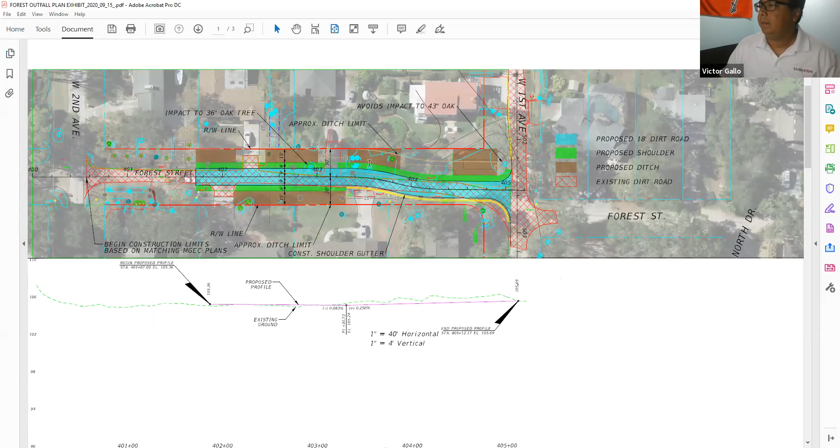This is the outfall improvement job for Forest Street between 2nd Avenue and 1st Avenue. We put this exhibit together. Let me see if I can zoom in a little bit more. Just to kind of talk about in a plan view level what the concept of our preferred solution looks like. In red cross hatching, you can see the existing road, the existing Forest, northeast to your right. And you can see in light blue the new alignment of Forest Street. And basically it follows a similar alignment.

It just has a typical of 9-foot lanes, 6-foot shoulders, and open swales on left and right. Just to go over the legend here, you can see the 18-foot dirt road that we're proposing in blue. The green is the proposed shoulders. The brown is to show the grass swales that we will be proposing and the limits of that, obviously between driveways. And the cross-hatching, like I mentioned, is the dirt roads. In the bottom, you can see the existing profile in dashed green. And in magenta, you can see the proposed profile of Forest.

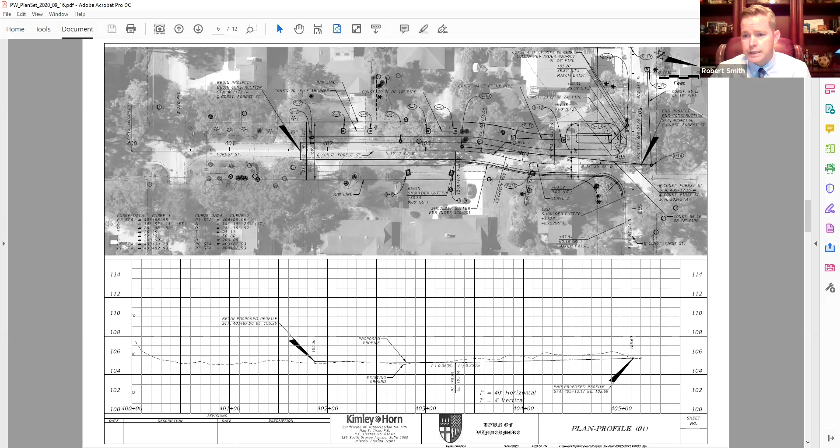Now, this is actually being fully funded by the town, so you can go less than the 18-foot travel width. But as town council has said in the past, we want to maintain dirt roads. The issue that we have is that we have a hodgepodge of road widths all throughout town. Now, people refer to fixes or semi-fixes that were done in 1983, 1993, 2003, 2011, 2012. All these projects were done without engineering. These projects pretty much die when you have people leave, when you have transition in employment. So the fixes, the graders and stuff like that, unless you have a typical section and an overall maintenance plan to maintain that typical section, it's very hard to do an overall plan for the entire town, because we're consistently inconsistent on what our roadways look like.

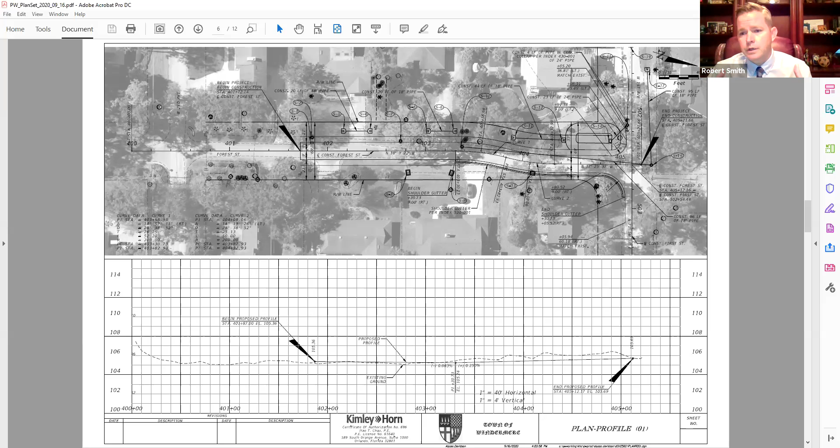But our intent, based on the concepts, is to make the roadway width as minimal as possible with the 9-foot travel lanes, and then utilize the shoulders and the swale systems to capture the stormwater until its final destination, which would be the actual retention area, and it percolates into the lakes. And if I said anything incorrect, Victor, you can go ahead and correct me. Your scope does include a final design. But again, right now, it's just showing you what the conceptual fix to this issue would be based upon the entire basin area, the improvements to West 2nd Avenue, and the issues that the adjacent residents have seen over the last couple of years.

Right, Victor? That's good. That's good. All right, thank you. Just want to make sure that nothing is out of line.

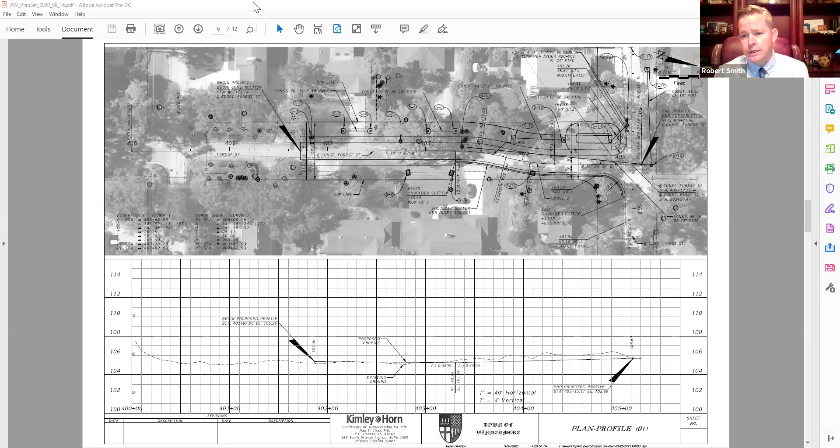And again, just because it shows a brown area, which is a horrible color to show people that it's going to be a ditch or something like that. You look at a 4-to-1 slope so you can mow it. It's grass. It's what you typically see as far as a swale system.

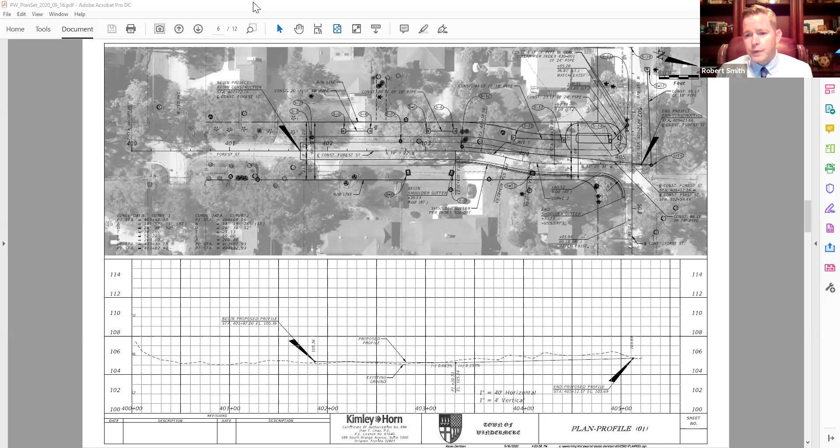And believe me, like with every other project that we do, we include arborists. We make sure that we try to protect every tree that we can. Even if there is an assessment done and it's determined to be in poor health, we'll try to do what we can to make sure that we regain its health if it's possible. And again, we have 60-foot right of way that we can meander this roadway by utilizing that typical section.

So, Robert and Victor, for clarification purposes, if it says a tree is impacted, does that mean the tree is going to be cut down, or do we have alternative methods to deal with the impact on that tree? Just so we're all speaking the same language.

Again, through the concept, we didn't utilize a certified arborist because we want to come up with a concept before we get into actual design plans. But we would defer to the arborist to make sure that if there was no way that we can go further to the east or further to the west to get out of its drip zone or its root system, what other best practices are available to save those trees?

And then if there is pretty much no other way to save those trees and it has to come down, we'll make sure that we mention that to the property owner. In addition to that, we would try to do whatever we can to make sure that we replant and reestablish whatever tree canopy is there that does not have a negative impact on the stormwater system that's constructed.

Right, Victor? Correct. So as far as the exhibit goes, for the footprint and the concept that you've seen, our assumption, without getting the arborist involved at this point, is that the edge of the road is too close to the tree. Therefore, we are here to have this dialogue and conversation. We're assuming that this will be impacted.

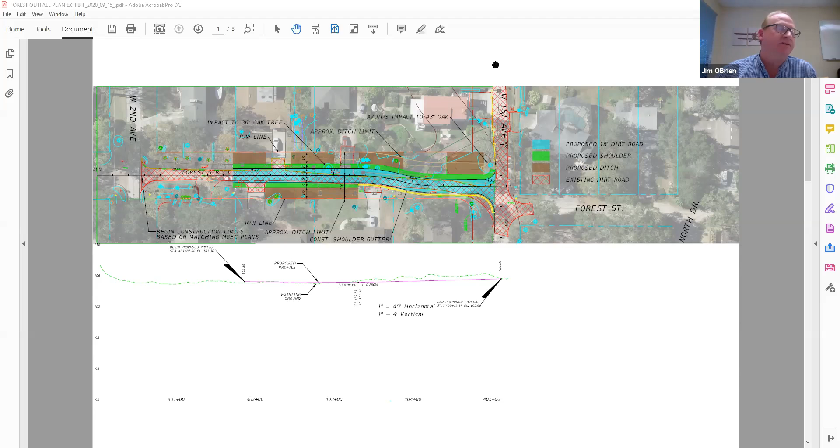Thank you, Ms. Lopez. I believe, Robert, this is not a sole solution. I believe that the work and mitigation on 2nd Avenue that is being studied and discussed now also plays a role in this. Is that accurate? Yes, they're going to be doing peer review of West 2nd Avenue and the stormwater improvements on that roadway. So hopefully there will be a net benefit to those that live on First and Forest that see any reduction in stormwater that may flow from that area.

And when you look at the brown area, Hal, if you can go ahead and cue up the picture of what that brown area would look like. Mm-hmm. I'm going to go ahead and share this. If you can go ahead and.

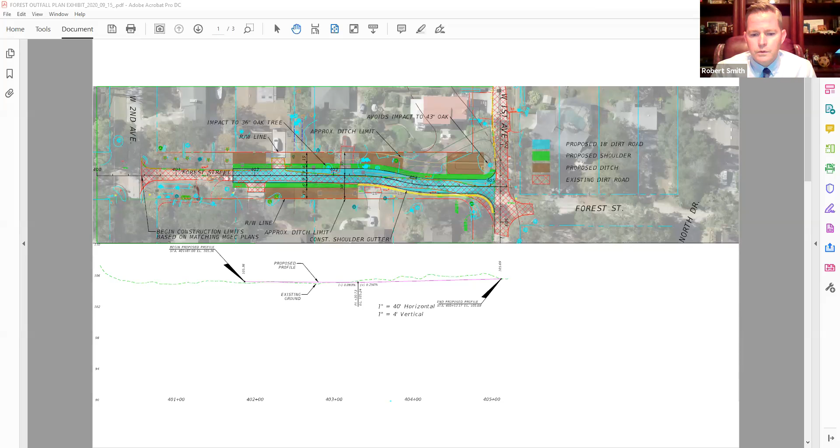Yep. So if Victor stops sharing, then I can start once you give me the okay. And Mr. Gonzalez, we will send you over some printed plans because I don't want you going blind by looking at the computer with a magnifying glass. You can see you. Yeah. But I see all the details. Yeah, well, good. I mean, we can make printed up plans.

Again, we're still in the concept phase, and this is to everybody. We're more than happy to go to your site and meet with you individually and show you the impacts. Again, talking about Ms. Lopez's tree, if there's a way that we can meander it, if we can reduce the right-of-way width in that area. As long as we maintain 18 feet, if we reduce it in some areas because of trees, because of environmentally sensitive areas, we can do that.

And that's why we're here to figure out what impacts are there, what concerns do you have, and we can manipulate the plan to alleviate those concerns as reasonably possible. And Robert, I have offered time after time after time to meet with the engineers. They have not contacted me one time. We have been dealing with the problem now for years since the city approved the previous system. This is unacceptable. So if the tree stays or if the tree has to go, which I truly hope that it doesn't, even that is not going to fix the other problems that I mentioned.

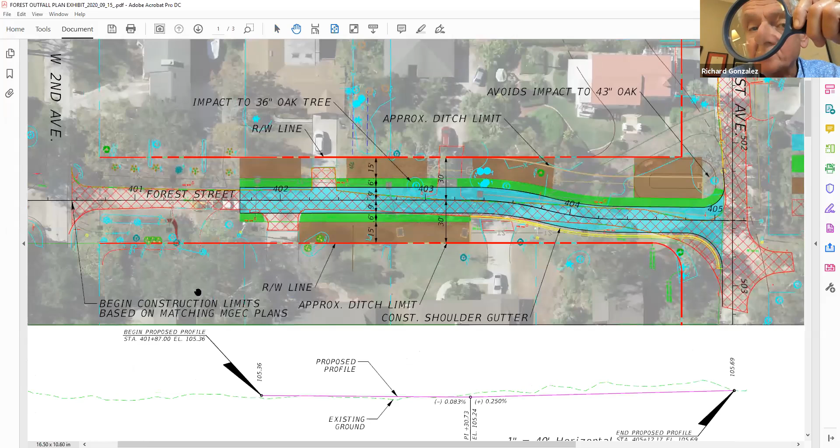Yep. Okay, Richard, I'm going to go ahead and put you on the clock, sir. Yeah. Did you have one that had color coding markings on it? That's the one I was looking at before. Yeah, there you go. As you know, I've been living here a long time, and when I first moved in, I put swales on the corner of my property and the town's property, and it's right on that. I assume that's the property line there.

And since then, the town has been using that ditch, and I purchased the house across the street, and I put swales over there. Those swales have since silted in because they weren't kept dug out, and that was not necessarily the town's responsibility to do that at that time. But right now, the rains that have come in the ditch that's adjacent to my property have been handled and are now leaving the property through French drains that I put in that were there before you did anything with collection of that water.

And those French drains were dug 6 feet deep, and 1-inch lime rock was put into them, and it took about 24 hours for the water to go down under normal heavy rainstorms, not hurricanes. So the ground is capable of recharging there if you had more of those ditches. So over the years, I put a small one in front of that house there, where Keith lives and where Sarah lives, back in that era, and I put some French drains in there too. And over the years, they kind of did okay.

And the hurricanes, of course, swamped the whole block and the whole area because trees fell and other things fell. So there were great pools of water that came down 2nd Avenue and then used all of 2nd Avenue as a reservoir for holding water till it could be handled or moved. One minute left. Yeah, so I have more to say about that sometime, and it would be effective to understand the design, because there are things that should be done here, the simple ones, and then the more complex ones, do them if we need to do them. And I offer to help on those. That's all I want to say. Thank you, Richard.

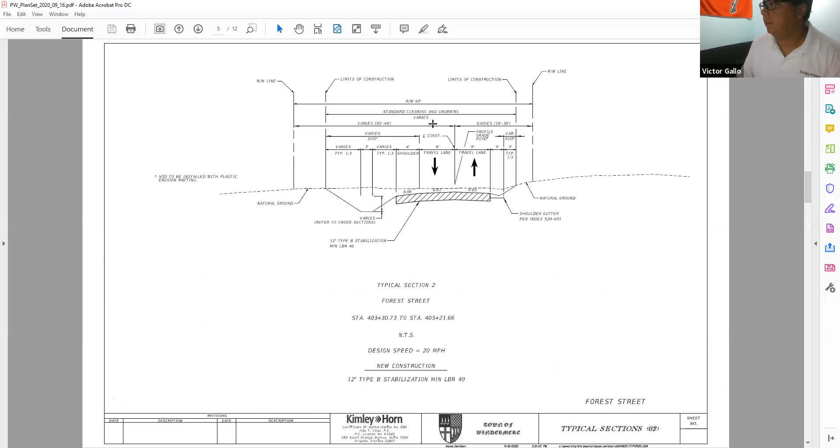Any additional comment from residents or public regarding the Forest Street proposal? Can you please discuss the blue lines, the pipes that are going in between the car stands and my house, please? Let me switch to Victor, he'll address that. Yeah. So there's an open system that was shown in brown here and in brown in between these driveways that will now connect with the swales and with side drains, like the picture showed, all the way down to First. So there will be pipe here, pipe here.

You can see there are some manholes that are basically closing the old system, but still utilizing the pipes from flows upstream. But basically the system right in front of these houses is providing the redundancy and the proper grade to get water that is currently pooling in this area out to the much larger system of pipes along First. So,

Sorry, Victor, that's not the one I'm referring to. The one I'm referring to is if you go to the color one, there's a big pipe going in between 110 Forest and the house to the left if you're viewing. So if you go to the color slide, is the one that's going, yep. If you move your hand a little bit northwest, you see it is actually physically going over my house. Oh, these ones here? Yeah. But I'm assuming the pipes are the smaller ones a little bit to the left. So if you can discuss all that, that'd be fantastic.

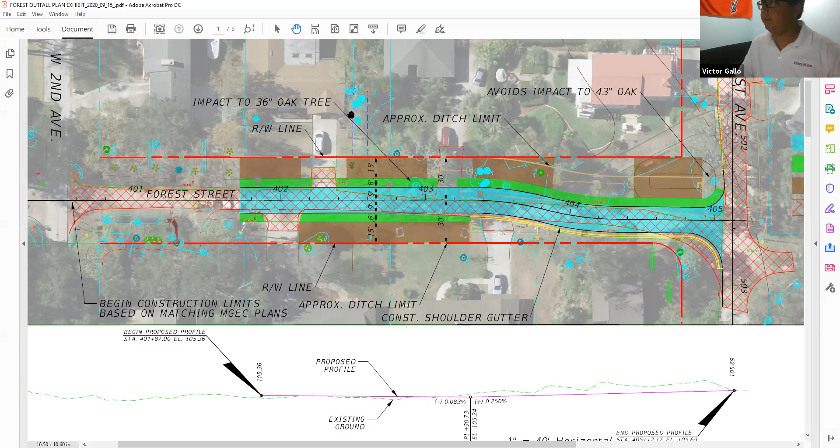Oh, yeah, no problem. So what we have here is line work from the surveyor. We have property lines that are shown in light blue. And I believe this is another property line here.

And these are not existing pipes. These are just topography line work. There are no proposed pipes in this area here. Oh, okay. Thank you. I thought that at some point it was being discussed to create some piping work in there. So those are just surveying lines. Okay. Thank you for confirming.

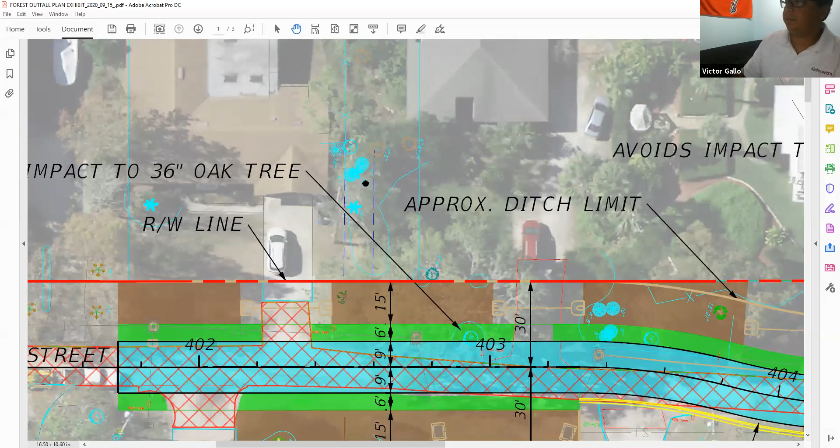Sarah, you are right. We did have a proposal or a concept that did have some pipes in the rear and a couple that came out through the side yards. So that's probably where that came from. We have Mr. Carson with his hand raised. Keith? All right, thanks, Council. Can you hear me? Yes. Can you hear me? Okay. Yes, sir.

So as far as the drawings go on the swale system in the brown rectangles, that does go right up to the property line, is what's reflected. Are you saying that that's not necessarily where the end of the swales are going to be, or just generally in that area, or is the swale going to encompass that whole right-of-way area?

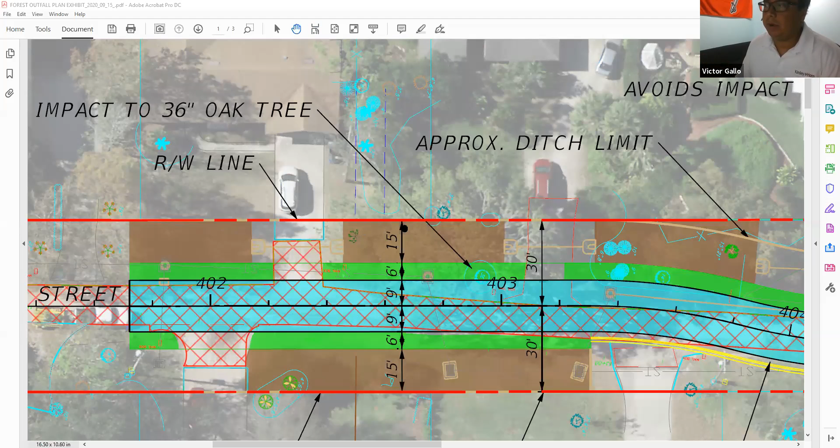Robert, I want to answer that. So what we're showing is, we're going to tighten up the design from the concept level, through permitting, through final construction plans. Right now we want to show that this area from shoulder to right of way can potentially get impacted. Now, when we finish the calculations, we determine the proper capacity, and then the ditch may be a

little narrower. The town has allowed us to use a V-shaped bottom, so it may be 3 feet, it could be 0 feet bottom in the swale. So it depends on what capacity we require once we are completely done with the design. At this concept level, we wanted to be transparent. We may have to go all the way to the right of way, but it may not be what we end up with. All right.

And the second question I have is for Robert. The widening of Forest Street to the 9-foot travel lane, which I assume is northbound and southbound, which equates to 18 feet in width. Is that required for drainage considerations, or is that required to see if we can get this paid for through a grant? Well, this specific roadway is not being paid for via a grant. We use the South Florida Water Management Grant just for the piping and no improvements to the actual roadway.

The minimal design standards are not only adopted by the state of Florida, but by the federal government as minimum standards for dirt roadways. And the more that we deviate from anything that has been approved by either the federal government or state government, as far as widths or design guidelines or principles, the harder it is not only to maintain your existing grants, but also seek further grants. So that is the purpose for the 9 feet.

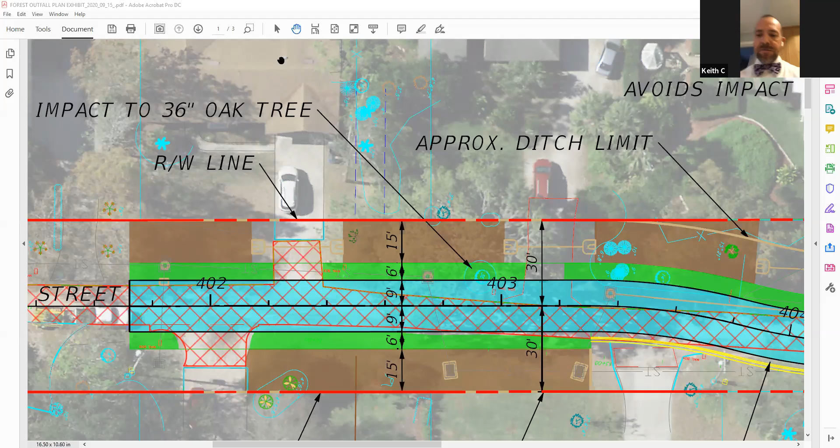All right, I think I understand. Thank you. That's the only question I have. Thank you, Keith. So a clarifying question. I'm sorry, I saw Stephen Withers with your hand up there.

Clarifying question: in terms of road width, could we calculate the area in green there, meaning the shoulder, if it is flat? Is that shoulder flat? It looks like it is to some degree, but it also looks like it has a slope to it. I was wondering if we could utilize that in our calculations for emergency vehicles and such to get around, and maybe not have the roadways quite as wide. Just an engineering type question, and whether it specifies that it has to be the same surface or it can be a varied surface.

It defines it as a travel lane, which is a consistent surface. The 6-foot shoulder is meant for, you know, if an emergency vehicle needs to pass, or if somebody gets a flat tire, they need to pull off to the side. So it is meant for vehicles to park there temporarily if needed. It's also meant to provide a buffer to things like a 1 to 3 slope where you have your ditch. So the shoulder is more of a buffer and an occasional use feature that the Green Book also requires. But when the Green Book requires a 9-foot minimum lane width, they define it as the travel lane width.

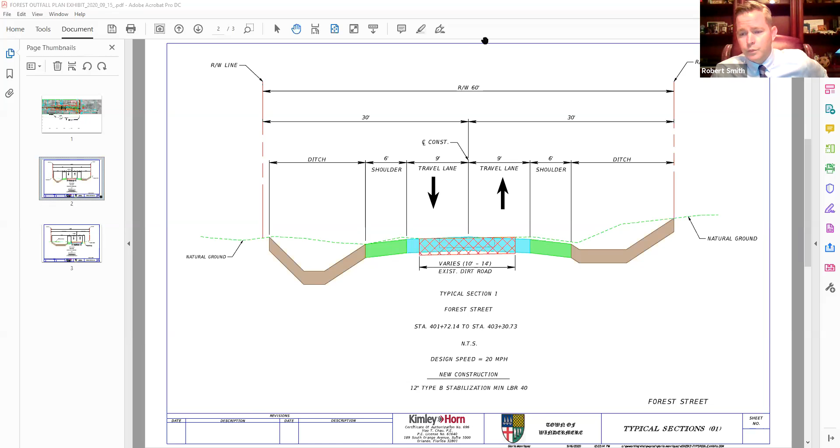Hao, can you go ahead and share your screen? We have somebody in the chat box questioning the fact that that is not true. So if you can bring up the Florida Green Book standard that indicates the 9-foot travel lane minimum width for a dirt roadway. Sure. Victor, if you could please stop sharing, then I can share. Thank you.

So I'll skip to the cover page. It has a really long name. It's the FDOT Manual of Uniform Minimum Standards for Design, Construction, and Maintenance for Streets and Highways, commonly known as the Florida Green Book. So this is the manual that we use for designs within public rights-of-way. There is a table in there, table 3-10, minimum lane widths.

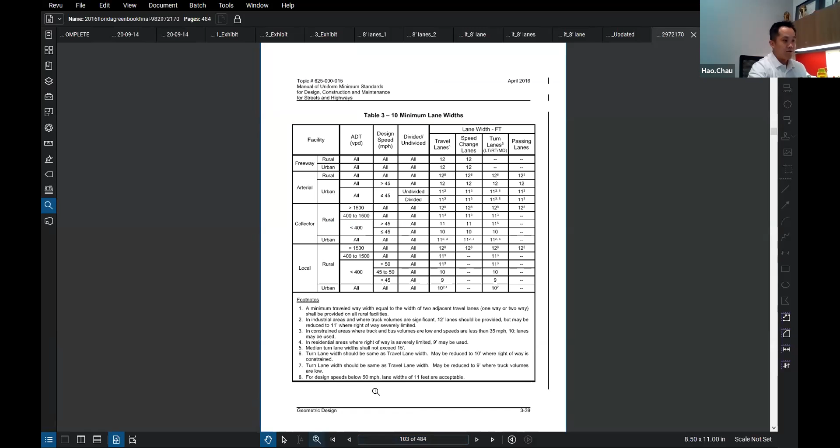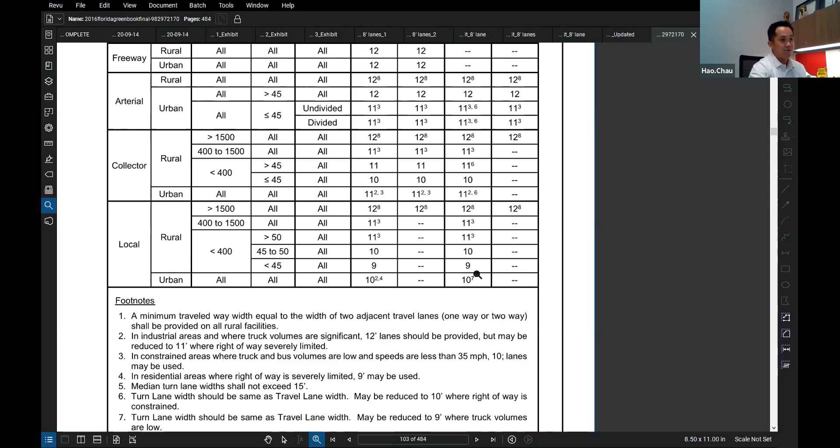And so to meet the criteria for that, you are a local road, it is rural, less than 400 trips a day, less than 45 miles an hour, and per this manual, it is 9-foot minimum for the lane widths. So this is for travel lanes, and it does apply to turn lanes as well. So that is the 9-foot guideline.

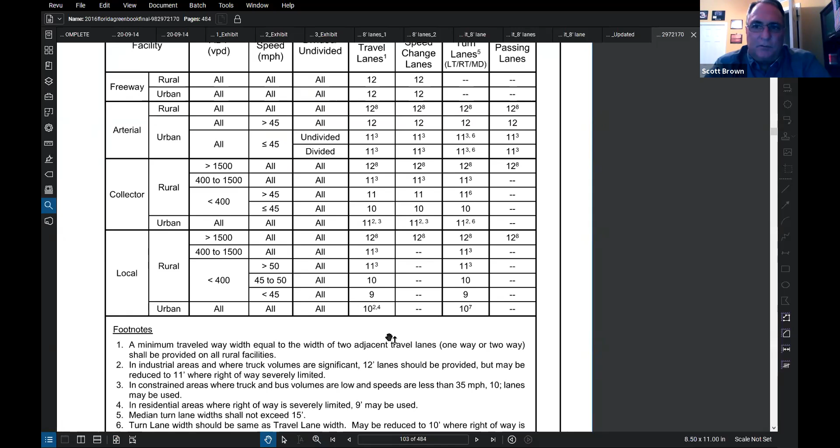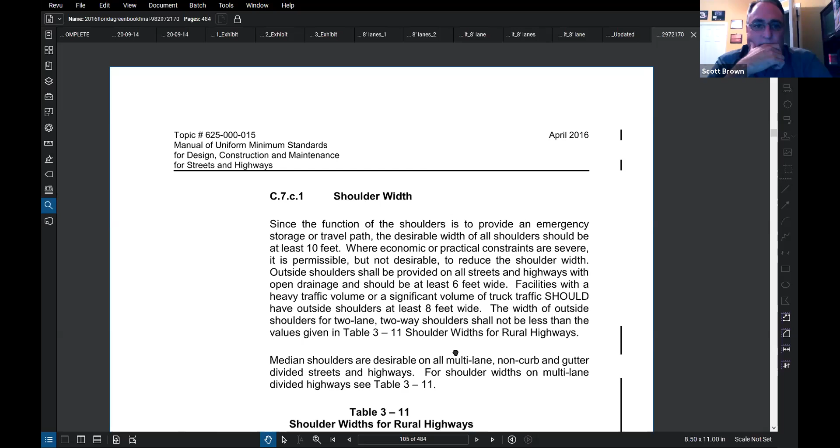Hao, can you also go over the shoulders while we're in this section, please? Sure. Minimum width of shoulders, for the mayor's question. So the Green Book also defines that. It starts off by saying that since the function of the shoulders is to provide an emergency storage or travel path, the desirable width for all shoulders should be at least 10 feet. But it says where economic or practical constraints are severe, it is permissible but not desirable to reduce the shoulder width. Outside shoulders shall be provided on all streets and highways with open drainage and should be at least 6 feet wide. So that's where we get the criteria for the 6-foot wide adjacent shoulders.

So I understand the desire to keep the roads as they are, to keep them narrow, but in order to meet these published standards that are applicable for public rights-of-way, they are supposed to be 18 feet wide for two 9-foot travel lanes and 6-foot shoulders that would be sodded.

And Mayor, we had a comment from Brandy in the chat box. I'm not sure if she wanted to go ahead and elaborate on that.

Brandy, that's fine. Would you like to speak now? Yeah, can you hear me?

Yes, thank you. So last year when this whole project started and we started talking about this green standard, I read the entire thing and I reached out to the state and I talked with a woman at length, and I can provide her information, and she even sent me some emails regarding specifics to that. And I was told by her, and she was one of the high level people in charge, that it is only true that we have to meet that standard if we're doing a substantial improvement to our roads.

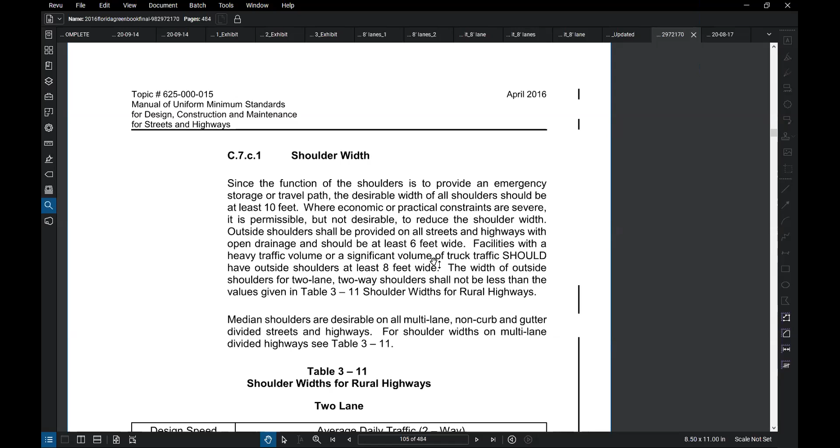Thank you, Brandy. Your address for the record, even I think I can recite it, but. Yeah, that's right. 835 Oakdale Street, Windermere, Florida. And it'll take me a little bit to get those records. I'm not in the state at the moment, but. Thank you, Brandy. Further comment on Forest from the public. Mr. Withers.

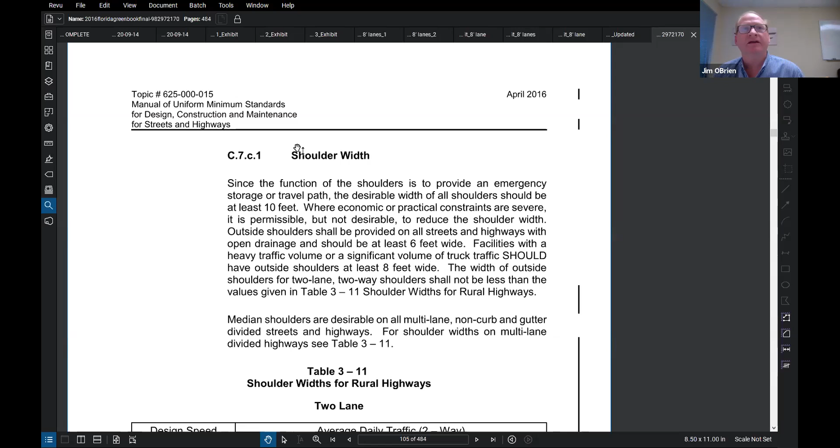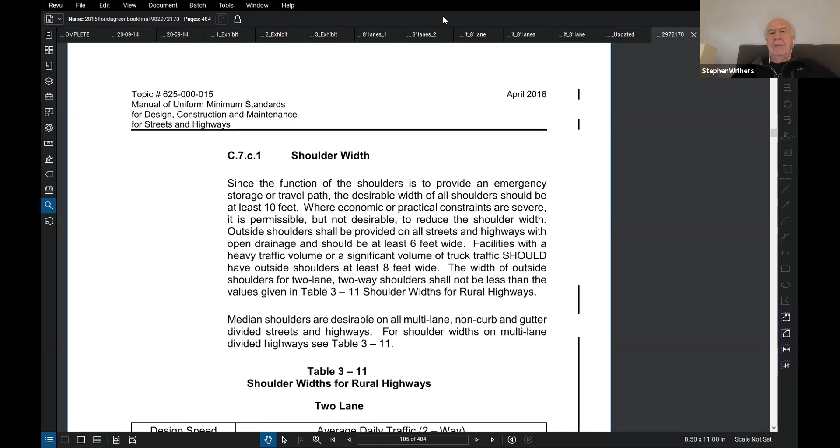Just a question, and that is, are all the swales connected by a pipe? And the second question is, will there be standing water in them that will percolate like Richard Gonzalez talked about when there's mild rain? In other words, is there going to be any water standing in the bottom of those ditches that'll percolate through so it doesn't move down the pipe system? And are all the ditches connected by a pipe? That's my questions.

Sure. Victor, I'm going to stop sharing. If you could share your construction plans. And the answer is yes, all the ditches are connected via those side drains. You see on the screen right there, S3, S4, S5, S6, S11. So yes, we are connecting all those as far as the outfall over to First. And as far as the ditches, they will be designed for a certain storm event. There will be water in the ditches during the storm, but they will both percolate and will also travel through the pipes to the outfall. And you can expand on that, Victor, if you need to.

Yeah, I think we're going to provide positive grading on the swales connected to side drains. At some DBIs, ditch bottom inlets, you may see them rise a little bit from the top. That's just a standard, to be able to hold the first sediment transport before it gets into the pipe system, and be able to maintain it in the swale instead of inside the pipe. Inlets will rise about 4 to 6 inches, but as far as the swale system and the pipes that you see connecting underneath the driveways, it will have a positive grading.

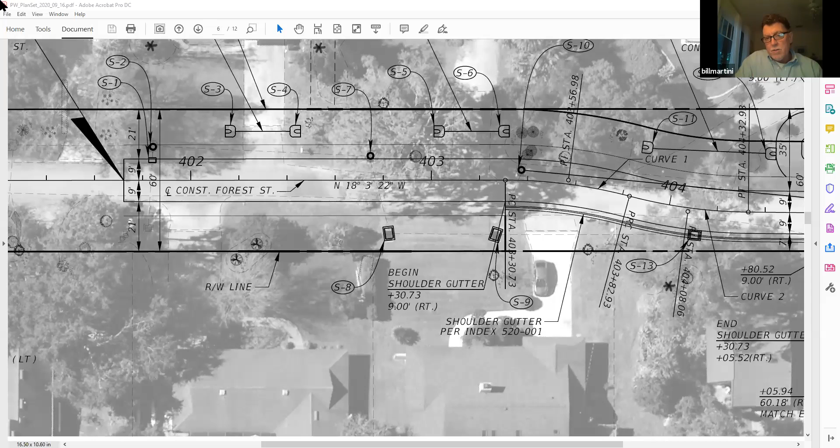And lastly, a question about the outfall into Wauseon Bay. One of the previous meetings that we had, there was some talk about water at the north end of Forest exiting into Wauseon Bay, overflow, I guess, not sure. I'd probably defer to Hao on question one as far as the travel lane would be a travel lane. So if you're doing a one way, I guess the minimum standard would be 9 feet. But again, I would have to.

Right, so if you do a one-way street, even if it's one way, you are supposed to accommodate emergency vehicles. So you would need more like a 15-foot width, which is what you kind of have now. So if you were to designate this as a one-way street, we could possibly keep the width that you have now, somewhere in the neighborhood of 15 feet, because you do have to plan for emergency vehicles, because as you know, emergency vehicles could use up both lanes if they needed to. So that would be my recommendation on that.

And then for the second question relative to when you're doing a site survey, I don't believe they do any trees that are less than 8 DBH. I think it's 4, Robert. Let me, I'll have to double check the scope, but typically, and this is from memory, our surveyor picks up trees with DBHs of greater than 4 inches. And that still doesn't describe the type and species of those trees, correct?

Actually, not all the levels are turned on. So the surveyor does their best to identify the tree type, but we go out there and we take a look at it. And I know the town has a certified arborist, so we would go out there and verify those tree types that the surveyor has on their files. Okay, so same principle that we had when we're looking at the 6th Avenue Main Street sidewalk program, where the majority of the trees were actually either invasives or.

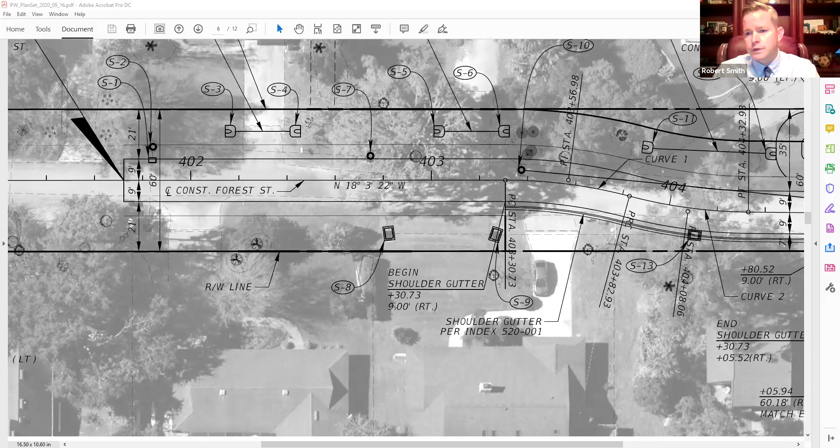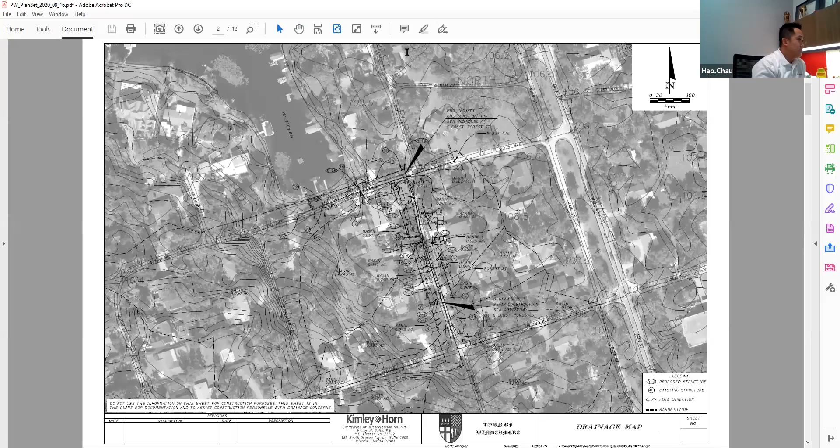So right now, on the north side of First, there is a swale that leads to like a weir control structure that overtops and then goes into the bay. We looked at this, and we're looking at, Victor, correct me if I'm wrong, but we're looking at kind of regrading that swale to provide a little bit more capacity, because that swale does get flooded during high storm events. Is that correct?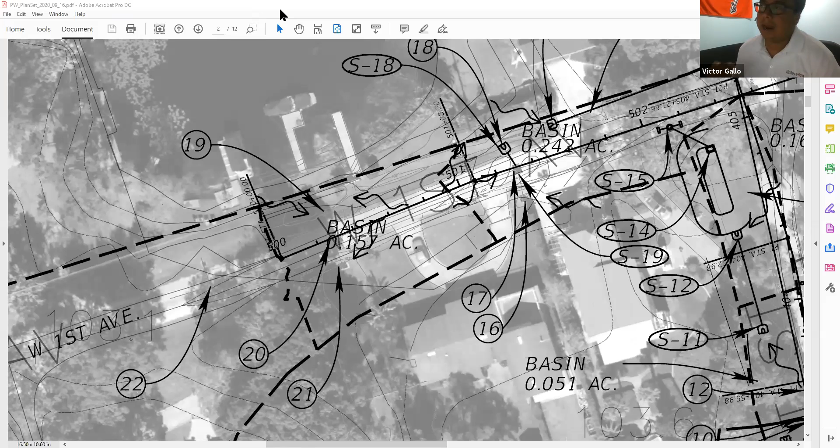Yeah, we're more looking at reestablishing the capacity that was originally designed for, and armor it, so we don't have to deal with erosion and washouts. The structure itself needs to be rehabilitated. It's kind of settling. So we're looking at the original design of these outfall systems, and we're gonna bring it back to those proper elevations, proper capacity, and armoring.

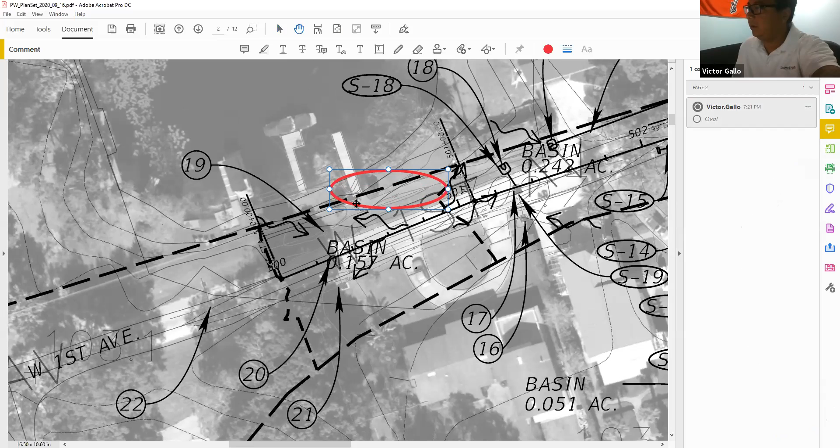Which item are we looking at on the screen here? Which number? Let me see, it's probably better if I can do a shape here. Is this area right here. Okay. There's a swale system right here, and it outfalls into a concrete weir. Okay, thank you. There was also a question from Jeff desiring to know where the low point is of the system. I believe it's right about in there somewhere, but just for clarification.

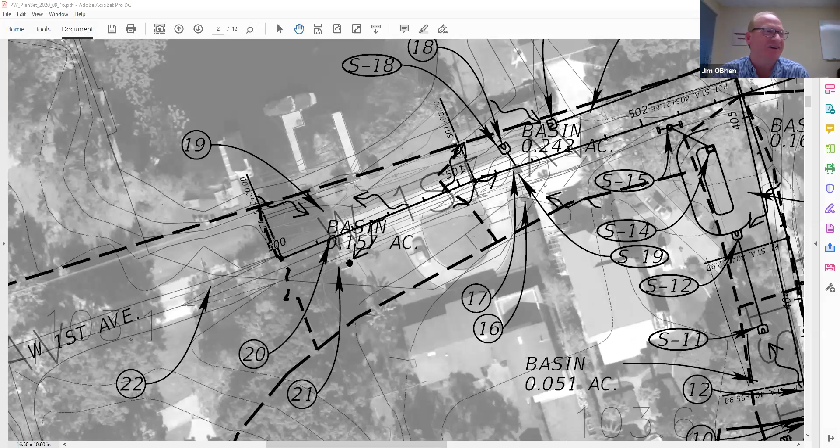Yeah, I'd like to speak. I just can't find the raise your hand icon. All right, Jeff, we're going to consider your hand raised real quick here. All right. So yeah, I had a couple questions. One being the low point. I think you answered that.

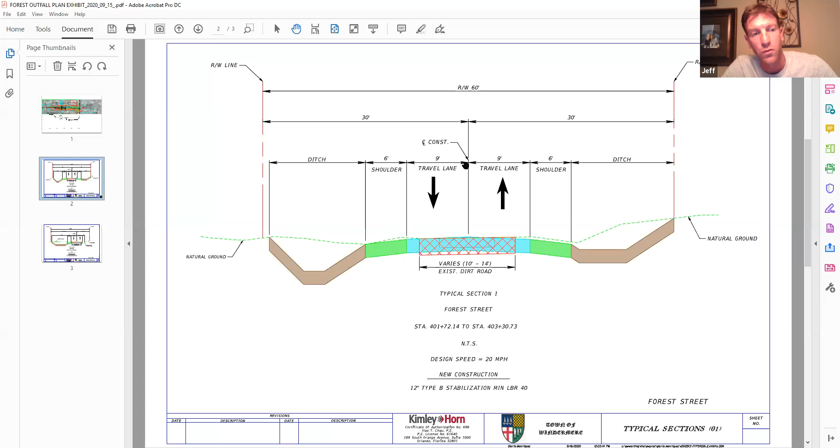So if we go back to the other screen on 2nd Avenue, where Sarah was talking about if you guys put the swales in, so you have the pipes going under her driveway, correct me if I'm wrong, all that water is going to go north, and then is it going to end at the property on Forest and First in that retention area, or is it going to continue down First Avenue into another retention area and then out? And additionally, is this swale system going to be connected to the old French drain system, or are these going to be two totally separate systems?

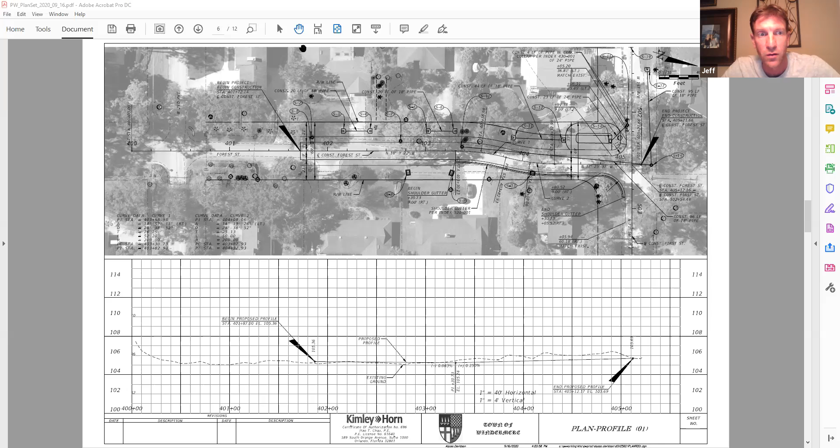And if they're separate systems, are you guys going to come back and maintain the French drain system? Because it seems to clog up very frequently. And when it clogs up, it's not percolating down. So all of it is going to my property, which is 219 and 212 First Avenue. Oh, and one last question: who owns the seawall that's located on my property that's sinking? Yeah, that is all.

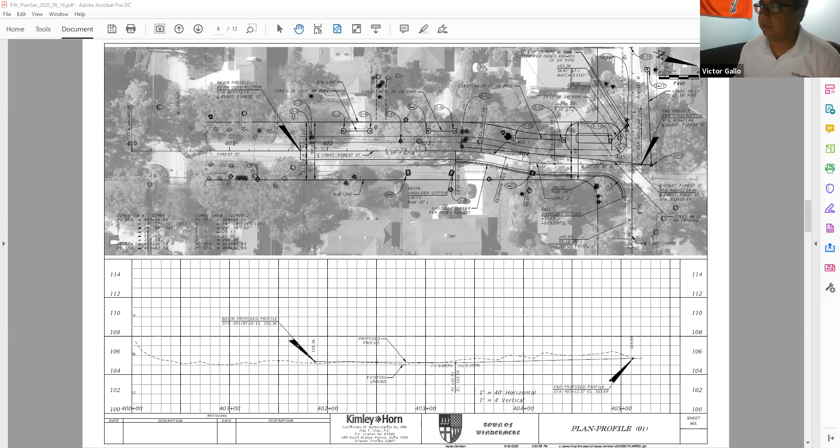The question about the water coming down from 2nd and going into the last part of the system at Forest, it is currently designed to continue using a 2-pipe system. The existing pipe system is a 24-inch pipe and an 18-inch pipe here. So we're going to continue connecting to that system. Right now we're showing, just like we did with the swales, basically the worst case scenario: upgrading a pipe to a 15-inch pipe here, and a pipe system right along the right-of-way here.

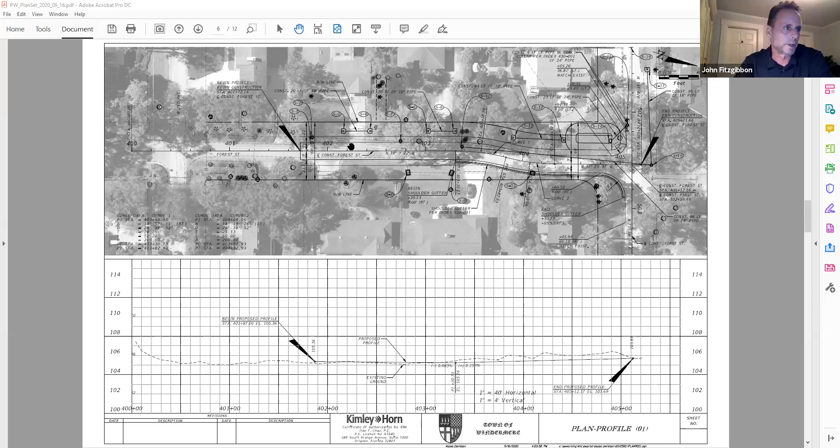But as we tighten up the model, we're going to try to be as least intrusive as we can along First, because we have the connectivity to a much larger system there. Victor, can you go a little farther north and show him where the overflow is with the weir structure? Because I think that's what Jeff's asking.

This is Forest now? Keep going down. Yeah, where the overflow is. This is the basin, the lake area. This is Forest right now. We're looking northeast. Jeff, is this the location? Yeah, where the two docks are with the boat parked, and then there's a little star, looks like a tree. There's outfalls right there. Correct. Yeah.

So here the improvement is that we're gonna correct the erosion that is happening by bringing it back to the original design grades and armor it. Based on discussions that are coming soon, we're gonna be using either articulated block or matting to basically armor this area.

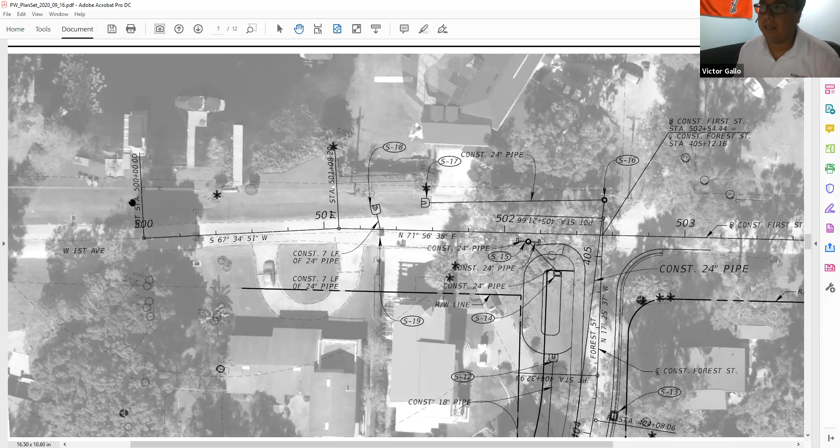It will still be grassed up, but to be able to take any kind of runoff that is currently washing out and also impacting the control structure. Right now, right inside the road, there's a catch basin or a grate on the road just south of where the boat is at the dock, located in the center of the road. You can see it on the aerial.

So what water does, and I pointed this out, is that it collects a little bit to the west of that drain culvert. It never goes in the culvert because the road's not high right there, and it drains right down. It saturates that whole area, fills it with water, and then it dries out. Fills it with water, dries out. And what's happening is that seawall that's right where the little hand-drawn asterisk is, it's starting to crack and sink. Yes. In 2 years, we have vertical changes of about 1.5 inches.

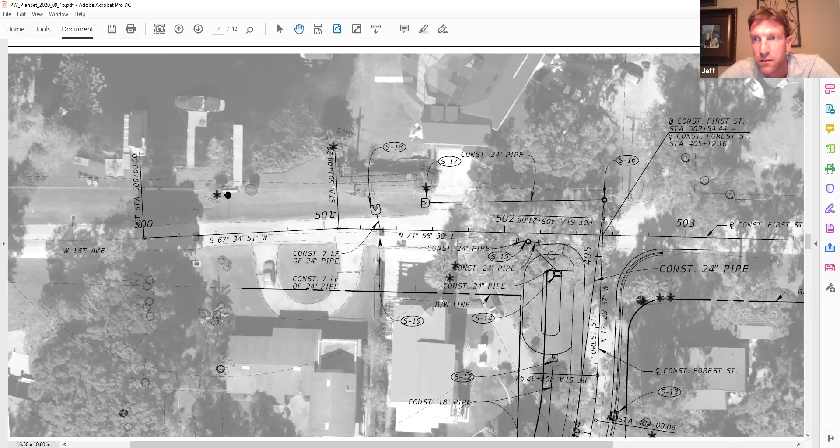Yeah, let me hop in there. Because that's the area you, I, and Hal talked about. And that's what Jeff is talking about when we're going to armor or reinforce that back berm, which is kind of that seawall and so forth, because we've seen some failures around the outfall, the water's come up. So we're going to be looking into that area a little deeper. So we should have something better for it at the final design.

Okay, do I have a say into what goes into that seawall, or is that seawall in the right of way, or does that belong to me? Well, let's get back with you on that. Let me verify that, I don't know right off the top of my head, but absolutely, we always ask for input like we're doing here. Another thing that I want to hop in and clarify, I've heard it a couple times today.

Both systems will be operational. They are on a bi-yearly cleaning schedule. Actually, the crews were out there within the last 14 days by coincidence, going through the whole system again. We saw a lot less than we saw back in December. So like I say, they go through there and vac out that entire system. So it is being maintained where it won't get totally clogged or anything like that. So it's going to be a usable system just like everything in town.

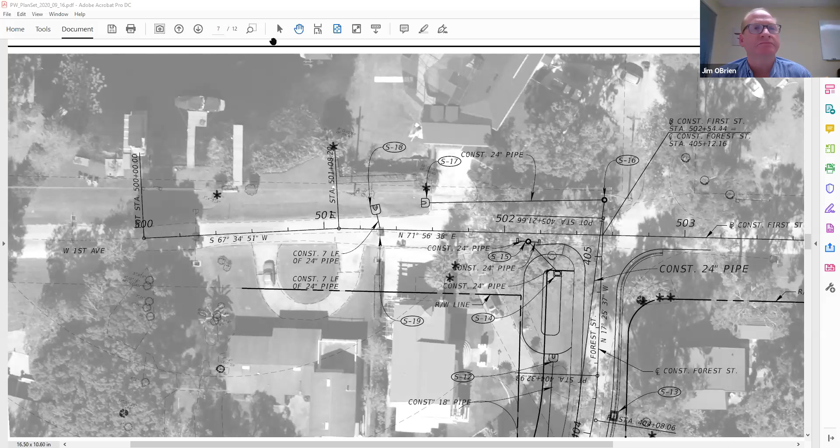Thank you, sir. I want to bring this back to council discussion. So Councilperson Martini had some questions and comments. Any further questions, comments from council? Hello, can anybody hear me? Yes, Teresa, I'm trying to get some council feedback, please. Okay, I understood that we were allowed to speak, and I haven't been allowed to speak before the council yet. I'd like to specifically address Forest Avenue, 7th and Forest, where the 1887 Schoolhouse National Register Historic Site is. Teresa, we're not on that topic yet. Okay. Let us go through this one at a time here. Thank you. Council, any further comment, discussions, or questions regarding the Forest Avenue portion of this?

I do. Councilperson McKinley, please. You know, we talk about concept plans and the green book, and we've got the Manual on Uniform Traffic Control Devices, and those are guidelines. When we widen these roads and install 18 foot of travel lane, we're opening this thing up, and if you think we've had problems with cut-through traffic before, hang on to your hat, because it's going to get worse. And just looking at it in my non-engineering brain, the width of a road has zero to do with stormwater. It can be a 5 foot road, it can be a 30 foot road. The method of controlling the stormwater is the same.

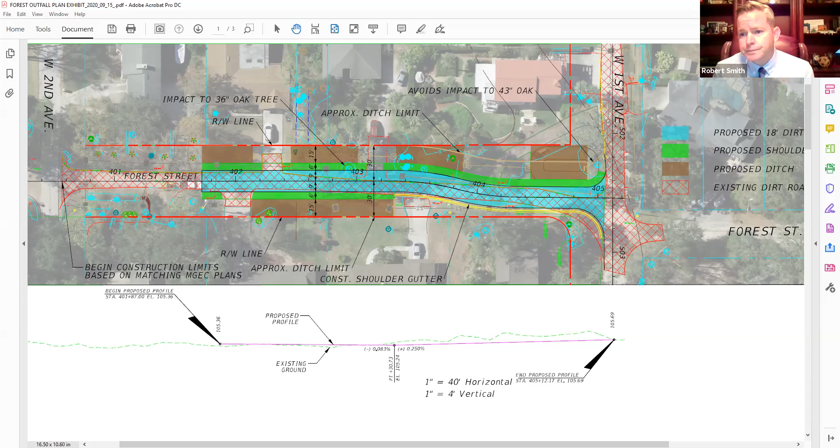Okay. And for the purposes of the record, as we sit here tonight, that is what truly counts as we make decisions and inform ourselves for a vote or however we decide to move forward. The purpose of this is to do just that, to come away with something that makes sense and that we can agree is a workable compromise and solution. So I want us to be better. So let's continue on that path. Thank you, Bob. I think we know exactly your thoughts, and I appreciate that. Council, any additional comment? I saw some of you nodding, and I'd like to hear your thoughts. Okay, I'll speak up. Councilperson Williams, thank you.

Thank you. I'm with Bob on the road widening. You know, if we want to come up with a standard width, let's look at all the roads and come up with a standard. Maybe it's 15 feet, maybe it is 18 feet. I don't know. But the road has nothing to do with the stormwater. But if we can start and say, okay, these are what our roads look like now, because that's what everybody wants to keep. They want to keep the characteristics of our road. So if it's a 15-foot road, that's what we should be basing our road off of, and then design out from that for the stormwater. I understand they're always going to give us the worst case scenario.

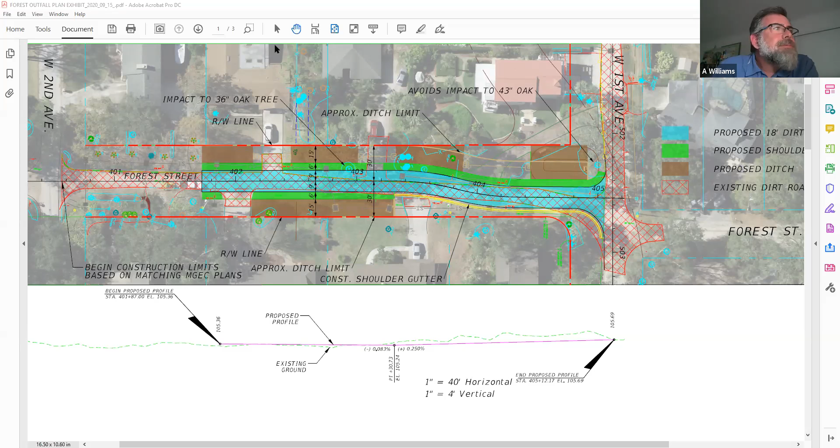Yeah, let me switch to the one sheet. So those side drains will be similar to the pictures I showed you. They will be set at the bottom of the ditch, and so it will be effective in conveying the ditch, with the caveat that it does have to be maintained. If the ditch starts getting silted and those pipes get silted up, the ditch will have to be re-scraped and the pipes will have to be desilted. So it will work as designed, but maintenance will still have to occur in order for those pipes to continually function.

But you know, with the closed drainage system and the French drains that are currently not working very well, we went with an option of the open system to supplement that, so that you can visually see when those ditches need to be regraded. And we also plan on putting erosion mats on the ditches so you don't have erosion issues as well. And Victor, you can expand on that.

Okay, I understand that. I'm having a hard time chewing on, we're asking residents to have, okay, we're going to do an open ditch in your front yard, and we're going to leave culverts in there too. It's just not a whole lot of room for landscaping. And Councilman Williams, if I may. Yes, sir. The culvert pipes are under the driveways. They're just driveway pipes. Okay. So the pipes aren't just out in the middle of the system.

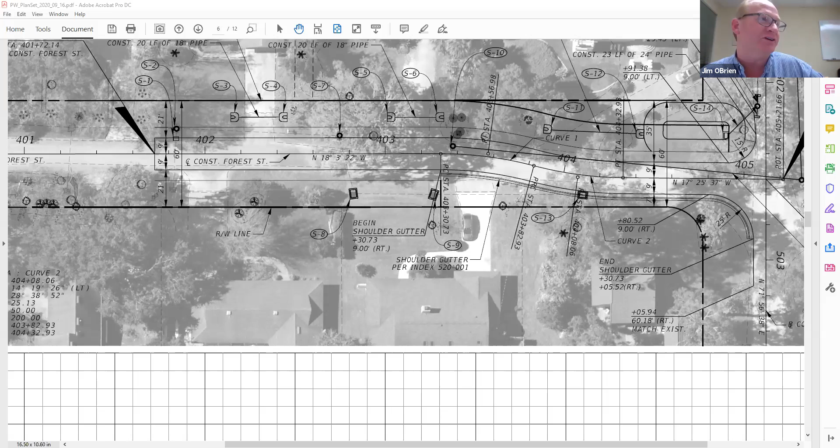And listen, if you guys look at it and say it's impossible, then you just have to tell us it's impossible. If it can't be done, it can't be done, and then we'll look at it a different way. But this is clearly what we're hearing, so let's see if it can be done. And yes, sir, look at the ramifications of that.

Now, as we move along on the agenda here, it is 8:17. We spent a lot of time on that project, and it's worthwhile. My hope is that some of this will benefit us in the next conversation. I also want to make it clear that I'm going to be a little more strict on public comment and time and the back and forth, so we can have a reasonable end time. I don't like for us to get too late in the evening, because it doesn't leave us the best business and best work.

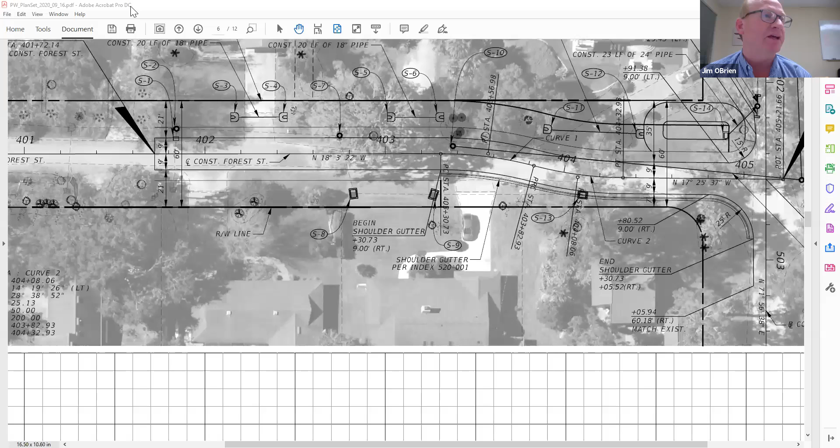So we're going to go ahead and move to Butler and 7th Avenue Stormwater Improvements Project. We'll have a presentation by KHA. I do believe that the flavor that we have taken with us on this first conversation will be beneficial. I think that we'll hear the presentation from KHA, then we'll hear our remaining public input for those individuals that did not comment on the other or may have additional comment for this particular project, and then council can discuss.

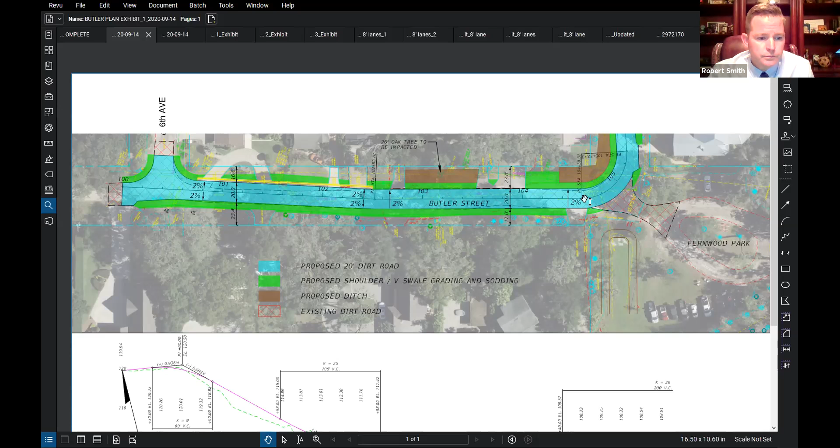Thank you, Robert. So as Robert mentioned, this is the first draft of our concept to meet all engineering guidelines and the FDOT Green Book. It is definitely open for discussion. So I'm just going to present the first draft of what we came up with for Butler. Sticking with the 18-foot minimum, this was the first draft, and we did show 20 feet of width for the dirt road, because actually on Butler, it's narrow, about 14 feet right here. But by the time you get to the middle of Butler, it is about 20 feet, and around the curve, it's about 20 feet. So because sections of Butler were already 20 feet, we used 20 feet as a typical width, just as a starting point. Now that can be reduced to 18 feet and still meet Green Book. And so these could be 18 feet if that's the direction we received today.

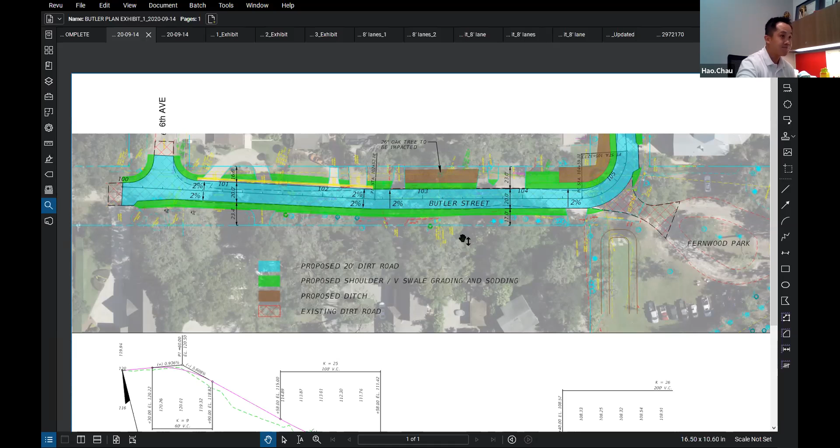So at the beginning of the project, I'll show you guys the profile. The high point is actually at 6th, and then there's a pretty steep grade that we're trying to smooth out, and it drops all the way until you get to Fernwood Park, okay? So for the first section of roadway, I'm gonna zoom in right there. These properties here are a lot higher than Butler, so it wasn't feasible to grade a swale without significant impact. So we're proposing a shoulder gutter with inlets that will convey it via pipe to this first ditch that we have here, okay? And on this side, there are a couple of large oak trees, and because there's not a lot of runoff because you're at the very first part of your basin, we are proposing shallow V-swales in order to preserve these trees through here.

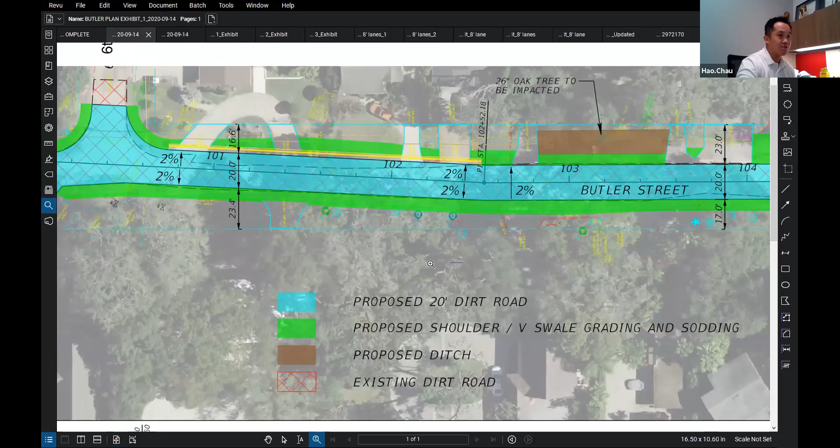And this is a normal crown section, meaning that the middle of the road is at the high point and it goes 2% in each direction. And I'm going to show you guys the typical for that here. So we did try to center up the road a little bit better from its existing, and it is dirt. The travel lanes here are shown as 20, but they can be reduced to 18 and still meet standard. Here's the 3.5-foot gutter on the east side, and then here's the 6-foot shoulder, and we will grade a shallow swale there in this area here, okay? So I'll go back to the next section. Sorry about that.

So similar to Victor's exhibit, the cross hatching is the existing road. The cyan is the proposed dirt road. The green is where we're doing some minor swale grading or shoulders. And the brown, and that's a bad color, represents the ditches that we're proposing as our first concept. From this point on, there is a well-defined ditch over here. So in order to reduce the footprint and reduce the impact, as Robert has stated, our proposal is to pitch the road 2% to the east as you go around the curve. That benefits you in 2 ways. The first way is that it's a narrower footprint.

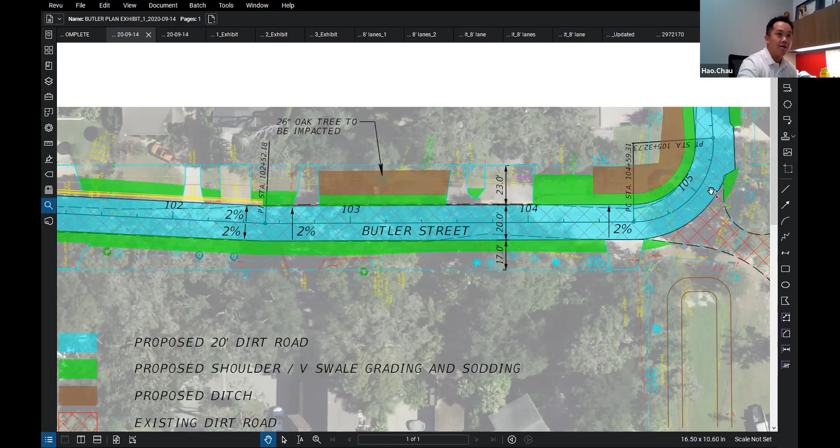The second is that it establishes a high point here along Fernwood Park, so you have less runoff going directly to Fernwood Park. There's also resident notifications to the town that there has been flooding on this property right here. And this would also establish a point where all the roadway runoff would drain into the swale system on the north side. And so that is why we're proposing what we would call a reverse crown section through here. We do understand that there is a 26-inch oak that's to be impacted here. We will partner with the town arborist to look at that tree.

And we'll... I can't see anything. Where's his map? Oh, I'm sorry. You're talking and I haven't seen anything. Oh, you guys can't see my screen?

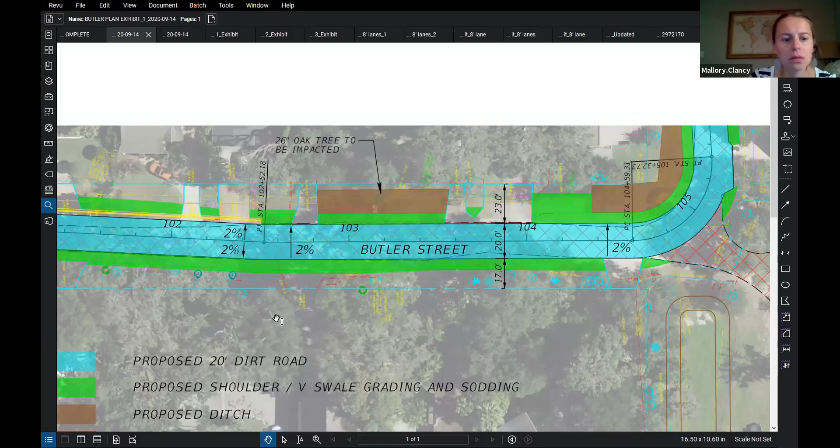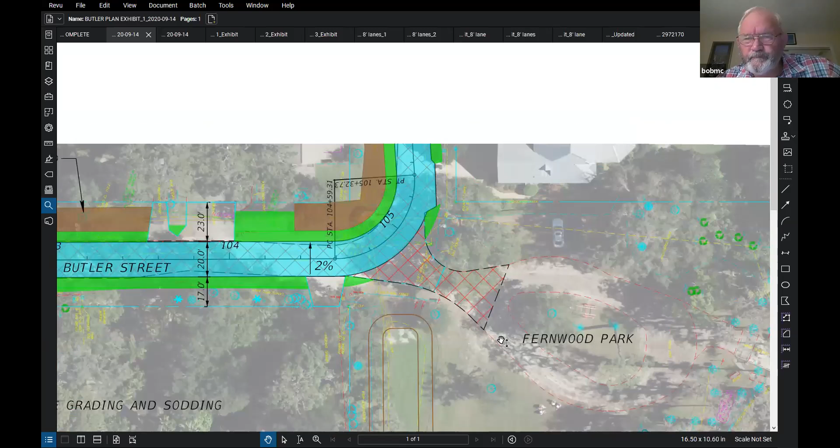No, we can see it. I'm able to see it. Yeah, I can see it, but would it be possible to move it further so that we show the entrance to Fernwood Park? Sure. Move it over a little bit. Can you see Fernwood Park now? Here's Fernwood. Probably the way I have my screen set up. Yes. Okay, so that's good, thanks.

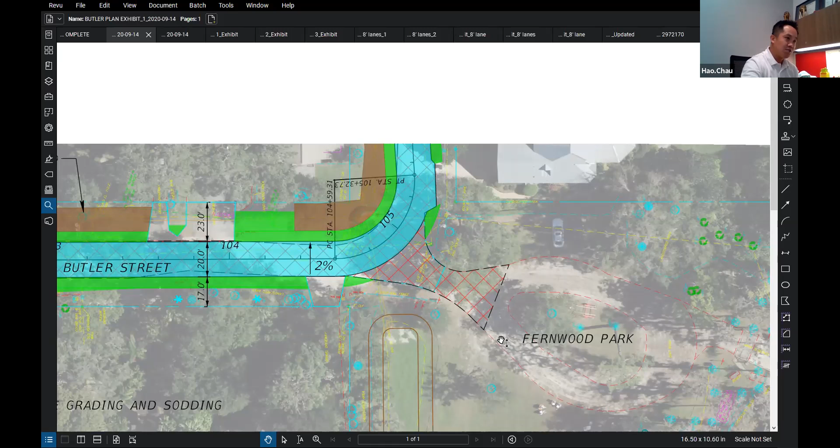No problem. So this is the reverse crown section, 20-foot wide with the ditch on the east side and then the north side, and addressing basically the runoff that's going to the low point of the basin, which is right in this area. This is the retention area that is at Fernwood Park. We're also proposing to regrade that to maximize the capacity, as well as provide a new outfall pipe into that retention area because the existing pipe is in poor condition.

I'm going to switch to the typical section. Do you guys see a typical section? Are you seeing as I switch? Yes. Okay. So this is the typical section with the reverse crown, and then only the swale on the east side and then the north side. Okay.

Now I'm going to go to as we turn the corner. So as we turn the corner, this is along 7th. So with 7th, generally the topography drops off from Main, and there is a little bit of a bowl here at Forest with just the existing topography and the washouts. We're trying to smooth all that out with our proposed profile, which is the purple, and getting that over to Fernwood Park more efficiently, so you won't have that flooding issue anymore. I'm going to zoom into the plan view now.

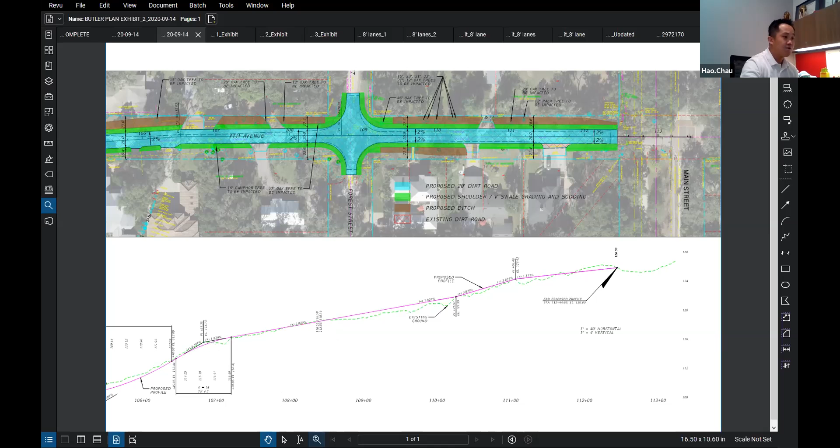And 7th, like Robert had mentioned, is more challenging. 7th does get narrower than Butler. So we can definitely discuss the widths that we want to go with, but we want to maintain the 2% through here, and we have identified a 15-inch oak, a 20-inch oak, and a 12-inch oak that could possibly be impacted, and we would look at ways to try to save them if possible, perhaps by jogging the ditch and making it narrower here and using some DBIs instead of a full ditch section through there.

So we are aware of these tree impacts, and we definitely want to work with the town and residents on that. But there are tree impacts on both sides. So it's tough because you kind of have to pick one side or the other for your ditch in order to address the drainage. And we want to partner with you to pick that side. But no matter what side we pick, there may be some impacts, and we'd have to go through what impacts are acceptable and what impacts we want to avoid.

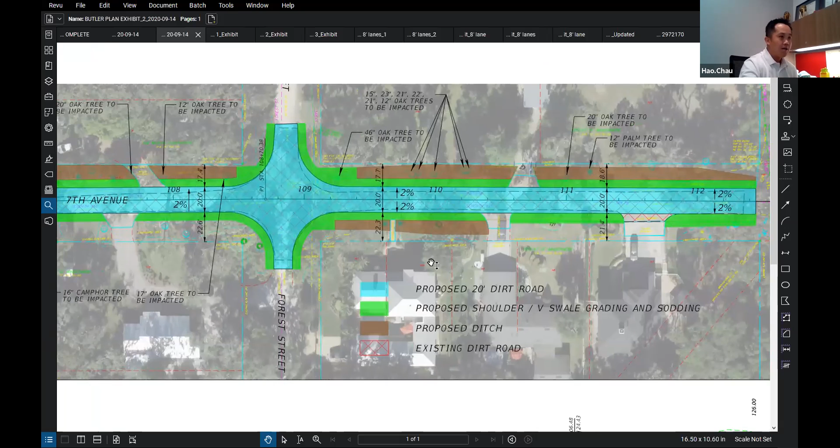Now, as we go through Forest Street here, initially I had proposed a ditch on both sides, and I understand that's going to impact a lot of trees near the 1887 school property. So in this section, we could do the same thing. We could do a reverse crown and put a ditch on this side. So that would be an option we could look at. Anywhere you see a normal crown section, that takes up a bigger footprint because you have ditches on both sides. With a reverse crown section, that 60-foot footprint would go to more like a 44-foot footprint. Okay.

Now I'm going to show you two typicals. The first typical is a typical that there is expressed concern over, is that basically we would be taking a majority of the 60 feet of right-of-way for the dirt road, the shoulders, and the swales. And Robert and Scott and I have spent all day discussing this and listening to feedback that I've been getting via emails. And so I've come up with a typical section that has not been shared because I just developed it today based upon feedback. And I'd like to share that with you and open it up for discussion.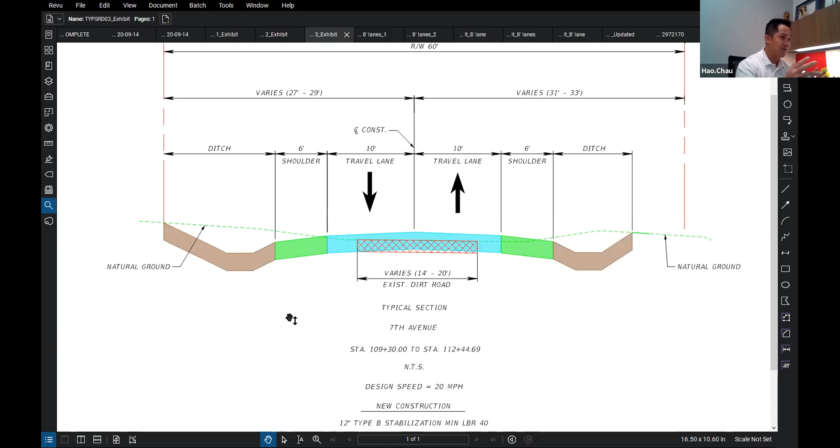Because of the impacts on 7th to trees, we're looking at a typical section that, sorry, let me find it real quick. Real quick, Hao, there's a question. What is DBI? Oh, a DBI is a ditch bottom inlet. Thank you. So what it is, there's a balance here.

If you put in too many ditch bottom inlets, you kind of run into the situation that you have with existing Forest, where you don't have enough swales, and then the swales don't get established, and you can't grade the swales to a specific elevation, and then you get silting up of inlets and you get flooding.

So we really have to pick and choose where we want to narrow the swales and use ditch bottom inlets, because there are pros and cons with dirt roads for ditch bottom inlets. The con being that they do get silted up and may not work properly. Now this is a work in process, definitely. I just put this together today.

So what Robert was discussing was that we could shift the road away from the side where we're putting the ditch. And basically what would be 60 feet of clearing or construction would go down to 44 feet. Now that would give you basically an 8-foot buffer on both sides where we would not be disturbing the existing condition. You would pitch the road to one side, and then you would go with 9-foot travel lanes.

This 6-foot shoulder would meet Florida Green Book, and it really provides two things. It provides a physical separation from the ditch, which is good from a safety roadside hazard standpoint. And it also provides room for you to run your water lines as part of this project when we get to the construction phase, which is further down the road.

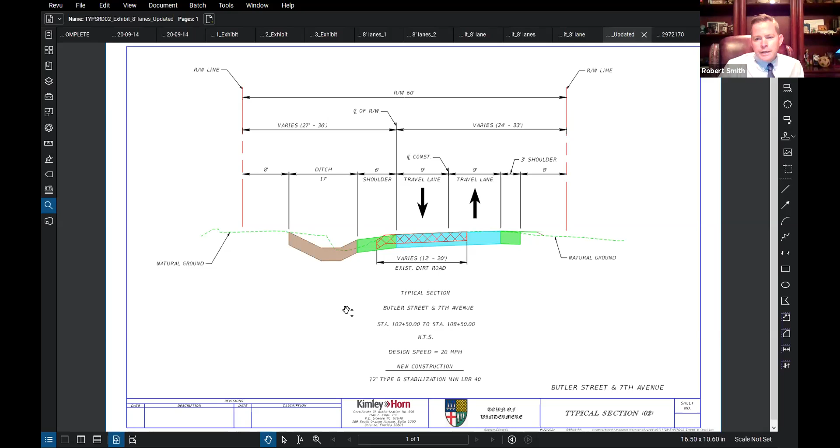Yeah, and as Hao stated, we adapt to the comments made by the local residents, and this is what we came up with to not only make sure that we're adhering to the minimum standards, but we're taking care of the stormwater. Now it shows 17 feet as far as that ditch. Understand that can be reduced once we do the final design. Typically you're looking at about 14 feet, and that's where we get the 44 feet as far as potential impacts.

Now it shows 8 feet on either side on the north and the south, but as Hao stated, when he gets to 1887 Schoolhouse, there's more vegetation to the north than there is to the south. That could be confirmed through site visits, and also across from the Stroups residence. You can see that there's more clearance on the south side than there is on the north side.

So it may seem unfair, but in order for us to make sure that we maintain the tree canopy and so on, we may have to meander more towards one side than the other. And hopefully people are understanding about that, to make sure that we're protecting that canopy as much as possible. And one of the comments that was made was if we had an arborist come out there, they're going to tell us that those trees are dead, diseased, or dying.

But you can rest assured that we're going to do whatever we can to protect those trees. If we can make them healthy, we'll try to make them healthy, whether it's through pruning or injections. But we'll try to protect that canopy as much as possible, because we are trying to balance that charm with creating this typical section.

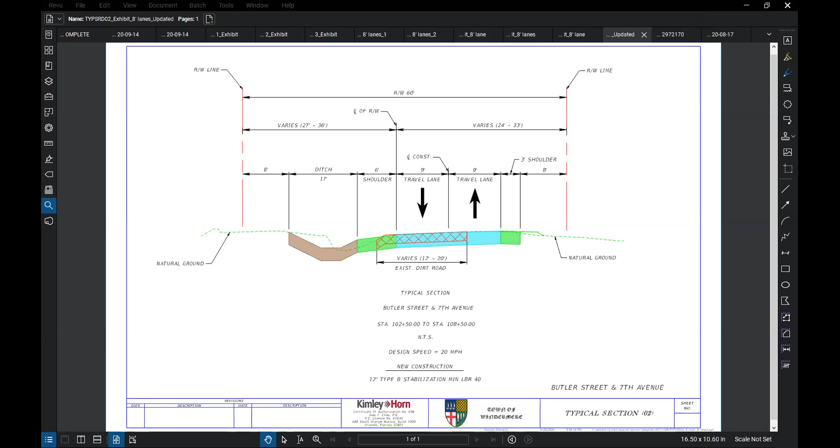Well, unless we specifically email you to ask for a copy of what's going on with this project, we don't hear anything. Every time I've asked you at a meeting for this information, you tell me I have to email you to get it. If we're residents that are impacted by it, we shouldn't have to email you guys to get the information, just like Mrs. Lopez said. It's been on the website. All right, thank you guys. Ms. Foglio.

Can everyone hear me? We can. Good evening, everyone. First of all, I want to say that I disagree with Brandy to a certain extent, because I even told Teresa this evening that as citizens, we're all responsible for going to the meetings, for looking at the meeting minutes to find out what's going on with the town. We can't be babysat with everything that's going on in the town. Second of all, we're all intelligent people here.

This was a preliminary design, and I feel that we can all together create a win-win situation for everyone, that everyone's needs are met, that we can mitigate the stormwater runoff. We can still preserve the look of the town, and we just have to figure out how to do that together. And I think that we can achieve that common goal. So I feel positive about this. I don't feel that historic trees will be removed. I think we can figure all this out. Thank you. Thank you, Joan. We appreciate that. Did you give your address, Joan? 215 Butler Street. Thank you very much.

Have I left anyone from the public out for comment? Carol Weller decided not to comment on the matter. I see Stephen Withers has his hand up. Stephen, go ahead. Yes, a couple of things. One is I live on 712 Main Street, which is dirt Main between 7th and 8th. And we used to have big ditches run all the way down through there every time it rained. And then Scott put a berm halfway down, and now the water runs into the old railroad right-of-way.

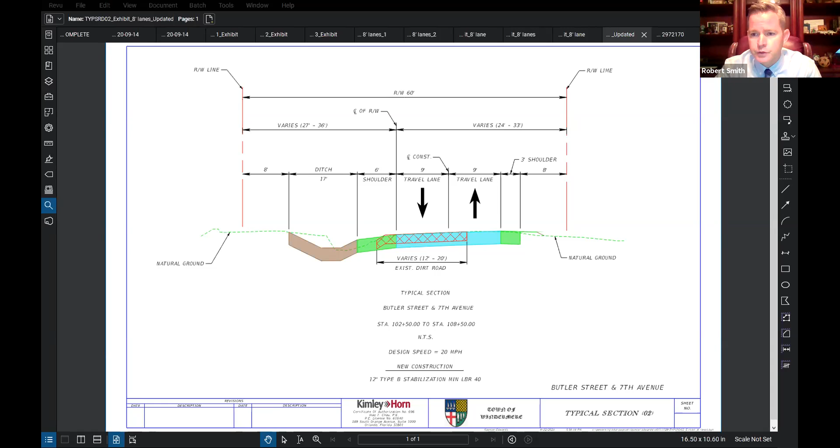Councilmember Andrew, I didn't want to interrupt you, but we do have Mallory on from Kimley-Horn and Associates that was here to directly speak about that subject matter. We just didn't have an opportunity to get to her about water quality and how to possibly utilize those ditches and swales as rain gardens.

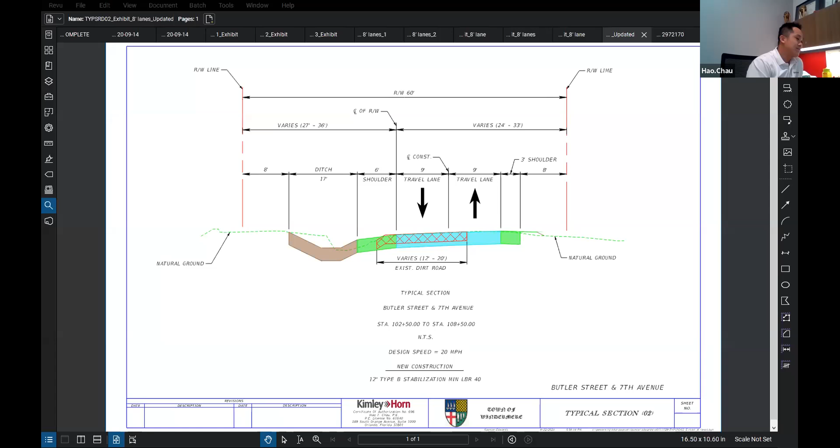Okay. Robert, if I may share a screen, we did look into the rain garden ideas and we do think it's a good idea. I know that it is really late and I understand that we didn't really get to the water quality portion, but if possible, could I just share a screen to show you the slide of what we're looking at?

Yes, please do that. I think we should hear about these things. I know that it is late, but we've got everybody here and it'll never be better than now. Sure. So can you guys see a PowerPoint screen? Yep. Yes. Okay. So if it's okay, Mallory, you can maybe take a couple minutes just to go through the slides real quick, if you guys are okay with taking a little bit more time tonight. Yes, please. Okay. So Mallory, you're up.

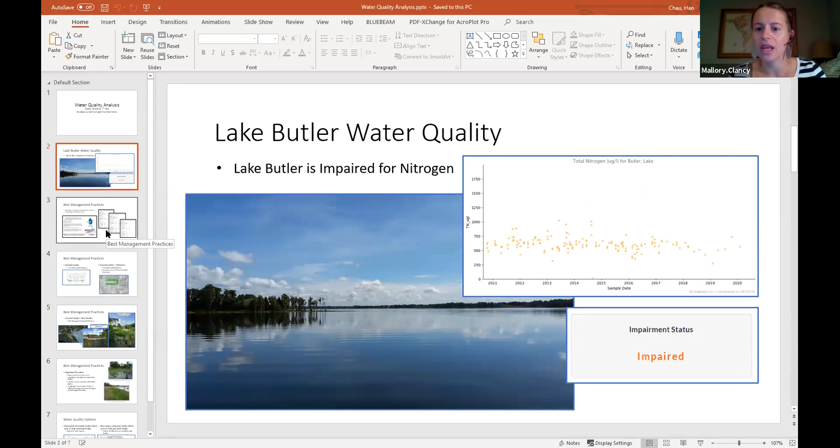I'll go ahead and start the, there we go. I'll just go slide by slide, so we can jump through it pretty quickly. I can summarize, but I can pretty much just talk about what we looked into. Reminder that this is still in the study level, so we haven't done any official design calculations. Lake Butler is impaired for nitrogen, so that's specifically the parameter that I was looking at. The next slide shows a water quality treatment software that I used to model different applications of stormwater BMPs and what removal efficiency we got.

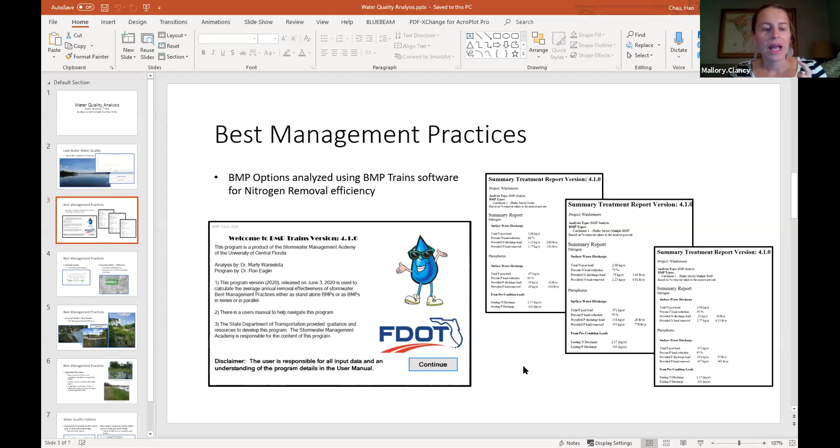So one of the first things I looked at was just the swales alone. So with the water actually crossing the dirt streets to get to Fernwood Park or downstream, with Hao's design of cresting the road and getting the water into the swales first before it gets downstream, the removal that we can attain is almost 60% just from passing the water through the swales first prior to getting it downstream to the outfall.

So then if we added that retention pond at the end, which is already in the design, and we take that into account, it achieves even greater removal. So between the swales and the retention pond, it provides a separation for that water before it gets into Lake Butler, and it gets a lot of that nitrogen out that way alone.

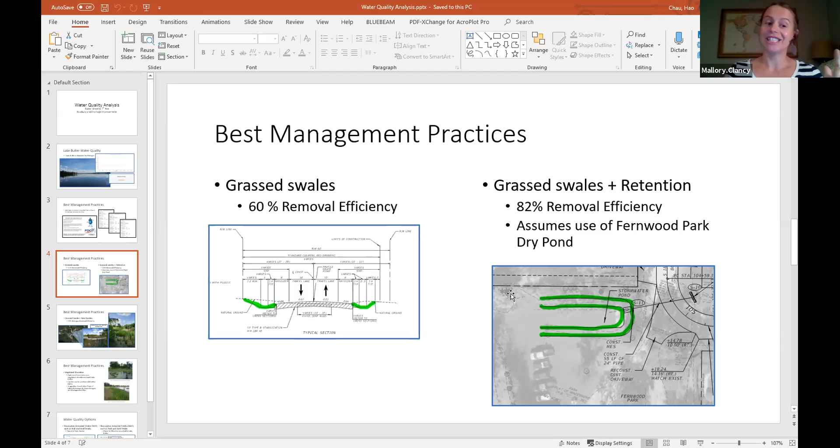So in addition to that, the next fun slide with all the rain garden pictures: if we turned that retention pond into a rain garden and added the plants, similar to the discussion of trees and how they uptake all those nutrients, we could really enhance the amount of nitrogen removal. It also slows down the water, so it causes detention, which helps the water infiltrate prior to getting out into Lake Butler. That infiltration achieves more removal and attenuation for stormwater.

And the removal efficiency, you can see there, we can add media that helps take up even more, so we can achieve almost 100% removal, keeping it out of Lake Butler. We did look into putting some of those plants into the swales themselves. Typically, those sort of applications become maintenance issues. Because of the sediment from the roads, if we get that sediment build up over time in a swale with lots of plants and media or gravel, then that removal is a little more difficult. So we may get more removal, but over time the sediment buildup will clog the infiltration in the rain garden.

So the swales themselves might need an offline area for retention for rain garden plants. That's something we can look at more, but this shows the amount of nitrogen removal you achieve with the rain garden just downstream at Fernwood Park. I appreciate that. I do want to have the rain garden down at Fernwood Park, but I wasn't proposing rain garden planting in the swales.

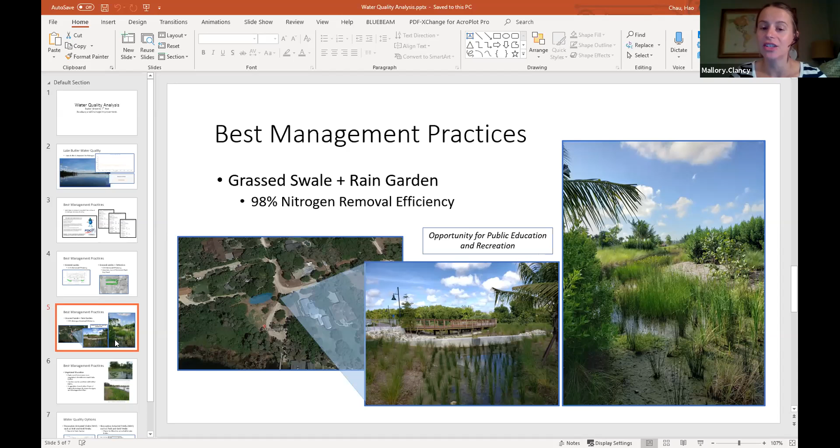Yeah, and any series of best management practices like that can just increase the amount of removal. So any other available open space that we're able to use could be implemented in that way. There are a few other things that could be done. Any sort of vegetated plantings along Lake Butler were recommended in the Harvey Harper report, The Chain of Lakes.

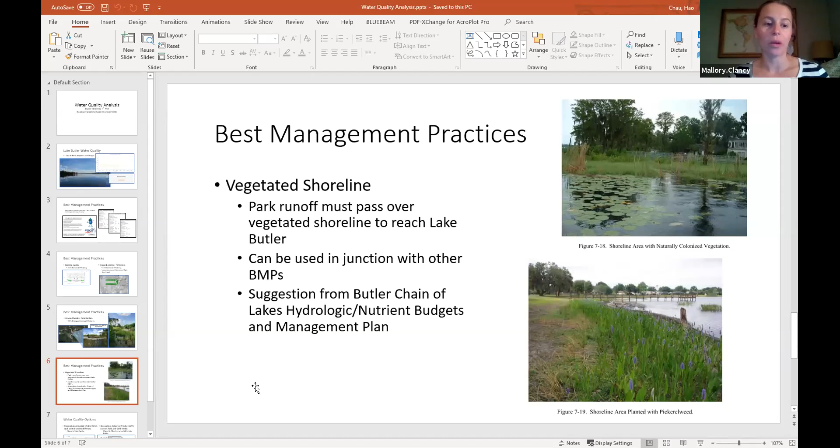Hydrologic and nutrient budgets and management plan report suggested natural or created shorelines. So those are some other additional treatment we could put in the Fernwood Park area. And I think there might be one more slide which just adds some more third-party treatment removal options, which are removal media that could be added into the rain garden itself or a retention pond by itself that just add increased removal of nitrogen and phosphorus.

So those are all the options that we looked at, but we can also look at different applications of them in different ways once the design gets solidified.

Thank you, Mallory. Appreciate it. Yep. Thank you. Thank you for your time. Thank you, Mallory, for sticking there with us. Sticking in, we're gonna make sure we get everybody.

Hey, I think it's a great concept. I mean, in terms of what we do with the water, and again, going to do everything that we can do to protect the lakes. And certainly if we were to have an intermediate stop, you may be able to reduce some of that flow and allow for some smaller water transporting methods downstream. But also the key here, though, is you still have to move the water to those gardens as well. So we still got to get past that hurdle to make these work in addition. So appreciate all the input there.

Thank you. Okay, Liz, does that help you, Liz? Yeah, I'm fine with that. Great. Thank you. Mayor, we did forget about Frank Krenz. He did sign up. Hang on. Frank, I'm sorry. I'm going to move my chat box and I can see you now. There you go. All right.

Okay, I'd like to comment, hadn't signed up, but I just had a stray thought. It may be too crazy, but is it possible to close some streets that are hopelessly problematic? Just close them. Use the street area for water retention, treatment, whatever. If you did that to 7th, you'd still have access to Fernwood from Butler. It makes a lot of things harder, garbage trucks, etc. But you could solve the problem.

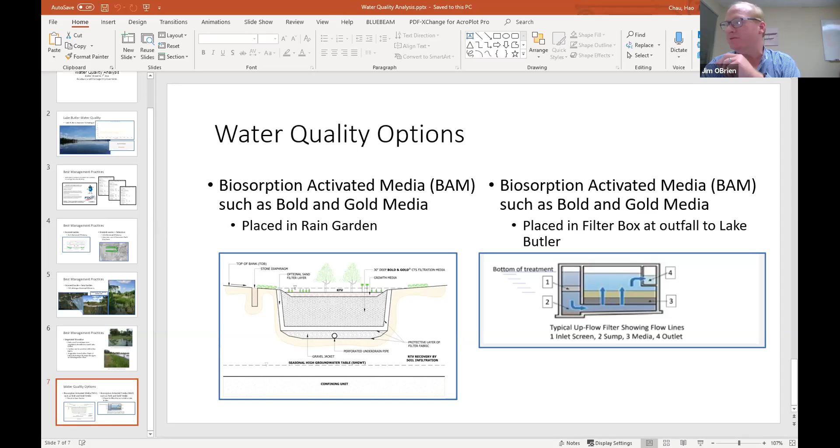It's like old times. Happy birthday, Bob. Happy birthday, Bob. Hey, Bob. We'll make it up to you. Oh, no. It's part of the game. The record. We're eating the cake tomorrow.